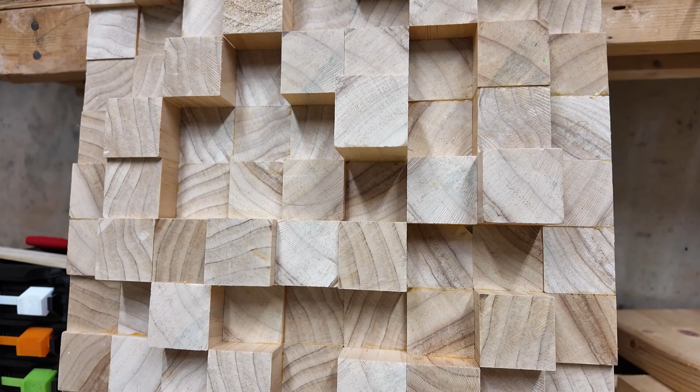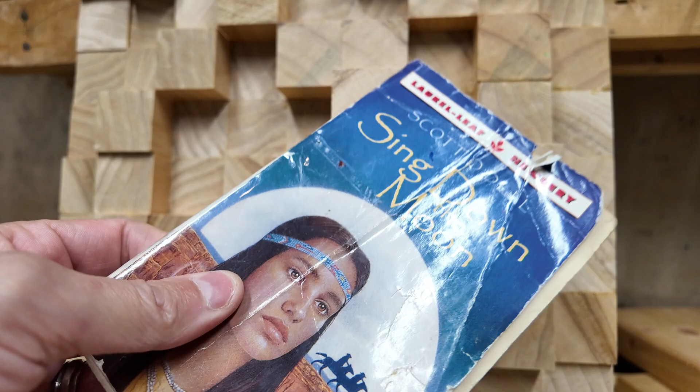So my kid brought home his first novel from school, and if we take a look here, it's fine, nothing big deal, but this thing is wrecked. We tried taping the spine here to get it going, but it's going to get beat up more and more inside of his backpack with all the stuff he carries.

So let's design something to keep this thing safe so it doesn't get wrecked in the backpack. This one's going to be pretty simple as far as design work goes. We're going to go into Sketch, and I think we're going to start this on the top view. That makes the most sense, mainly because we're going to build up. Now the book itself is just under 7 inches, and the thickness of it is just under a half inch. So we're going to set those as our baseline.

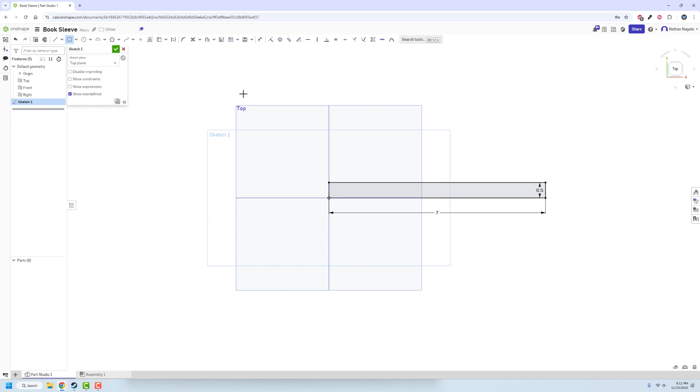Once we have that, we could draw another rectangle around this, or we could use the offset tool to get the exact same effect done. I'm going to use the offset tool here, and we should get an error message, and we're just going to drag that out, then hit enter, and all we have to do is change our distance here. I'm just going to change that to 1/8 of an inch. It doesn't need to be anything crazy, but it should work fine for what we're doing.

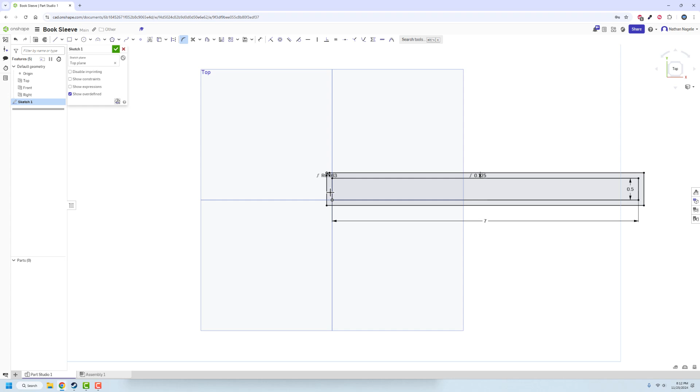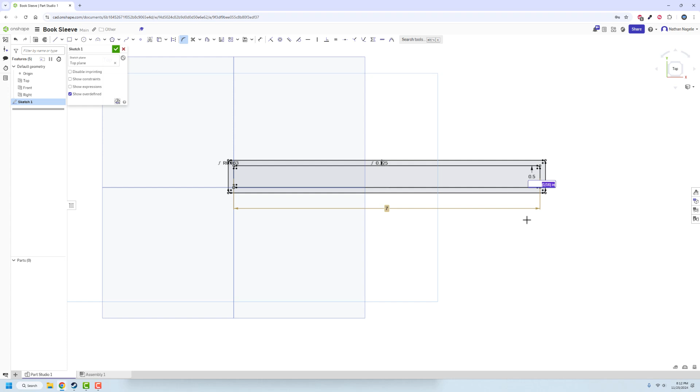And then we're just going to quickly add some fillets here to the inside edges, and those are going to be 1/16 of an inch, I believe, is what I want to make those. Nothing crazy, but just setting where we need them to be. I can do this far more quickly once we extrude it, but I'm just doing it now because that's what I feel like doing right now. So we're going in, getting all of those edges set to be a 1/16. Nothing crazy, but setting the inside and outside corners there, making sure we have a consistent thickness all the way around. So I'll finish the sketch there.

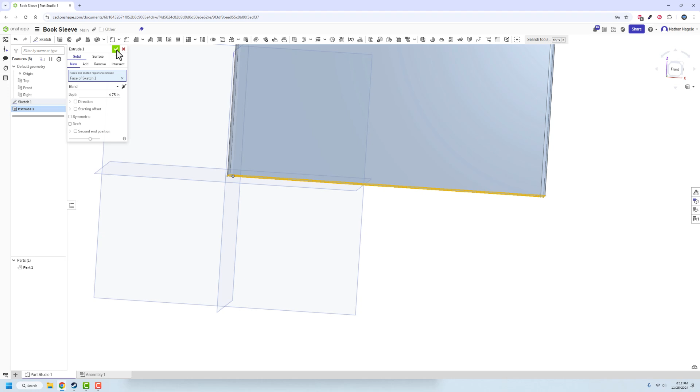And then we'll add another sketch to the bottom of this. We'll finish that up, and we're going to extrude just that sector out, and that's going to be 1/8 of an inch. All right, so that's going to be kind of the initial setup here.

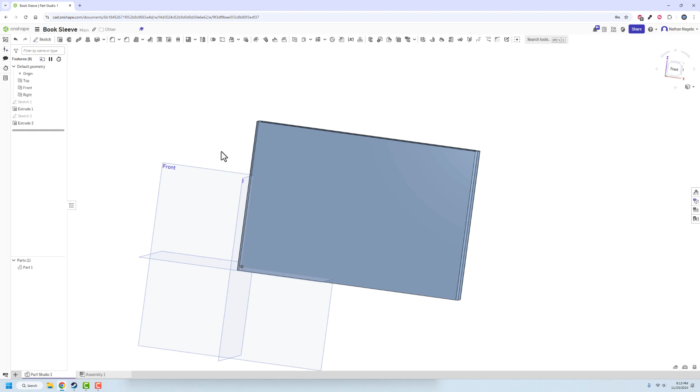Now, that's not going to be all we want to do. We also want to add a place for your hand to go, to figure out what exactly is going on with this. So I'm going to go into Sketch again, and then we will get this figured out as far as where it's supposed to be. We're just going to use the 3-point arc for this to set where that's at, and then we can use dimensions to really define exactly where that's supposed to be.

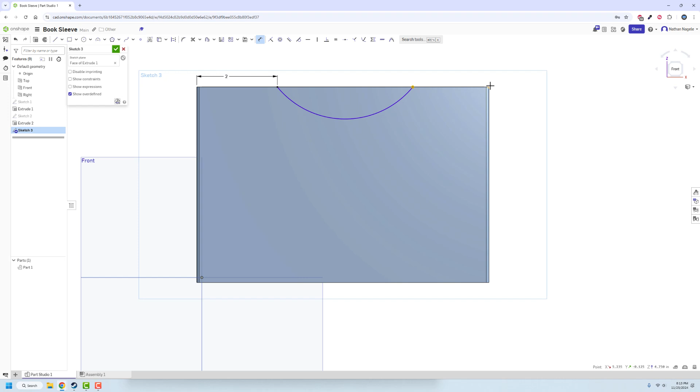So we say that's over 2 inches, and then this one, if we make it also over 2 inches, we can get that set, and then the radius on that, if we make it 2, sure, that should work. Then we'll extrude that and remove, and instead of blind, we're just going to go through all. It will cut that out of everything.

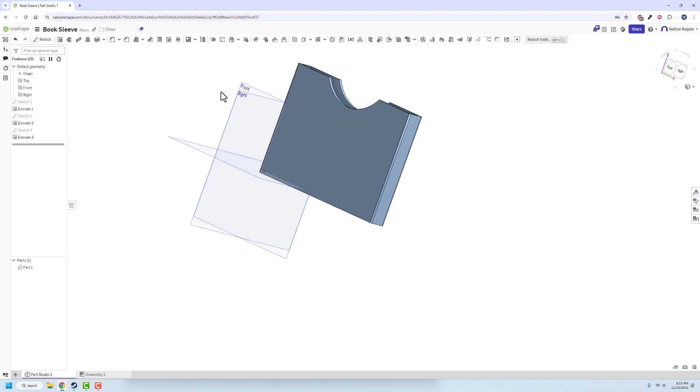So we have that. The book should fit in there, no issue whatsoever. I actually think I want to change the height of this extrusion. Instead of being 4.75, maybe 4.5. I think that might be a little bit better for what we're doing here.

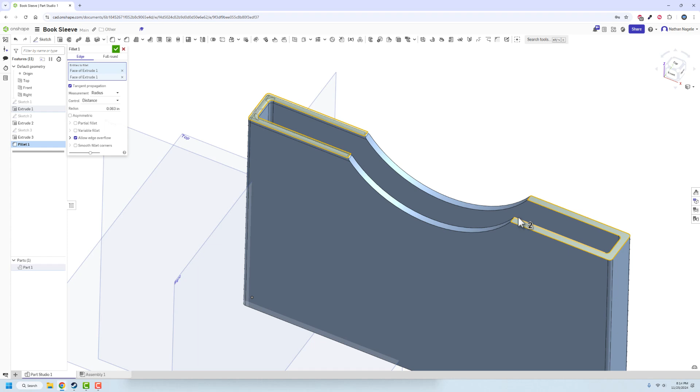And then we're going to put a fillet around the whole top edge of this, and it's going to be 1/16. That should allow us to round over all of the parts here. Let me not get the edge here, but the actual face. And we'll do the same thing with this one and that one. And we'll hit our green check.

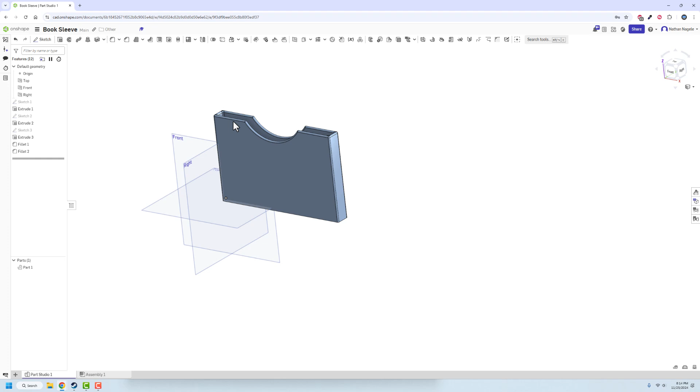And now we have all of that in there. The only other thing I'm going to do is put fillets on this bottom face in here, just so the book doesn't have a corner to escape into, so it's a little easier to get out. But that is all we're doing. The whole point of this thing is just to protect the book while it's in the backpack so it doesn't get mashed by all of the other things my kid has.

So we're going to export this. We'll throw it in the slicer and see what we have.

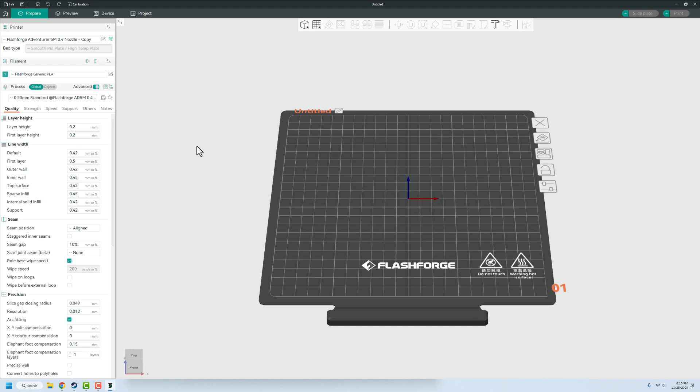So here it is on the slicer. It's going to be a relatively thin print, and it's only a 1/2 inch, so I'm not really worried about wobble or anything. Like if I were making a really thin tower or something like that, this should be based up enough to not really be a concern.

But I am printing it not on my bed slinger, but this is going to be on my CoreXY, just because I don't have to deal with the bed itself moving where it could shake this thing off. The bed just is slowly moving down, it only goes up and down. The head of the machine itself is what goes through and changes all that.

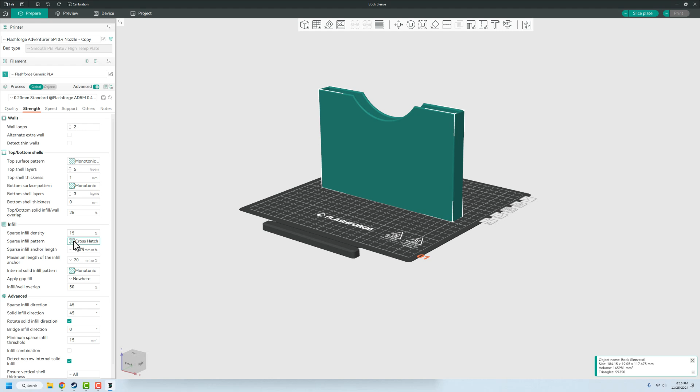So the only other thing we're going to do is with strength here, 2 wall loops is just fine, our sparse infill density is fine. The only thing we're really going to change is instead of crosshatch, let's just change that over to triangles, and we'll do this one too. Sure, whatever, we'll get that in there.

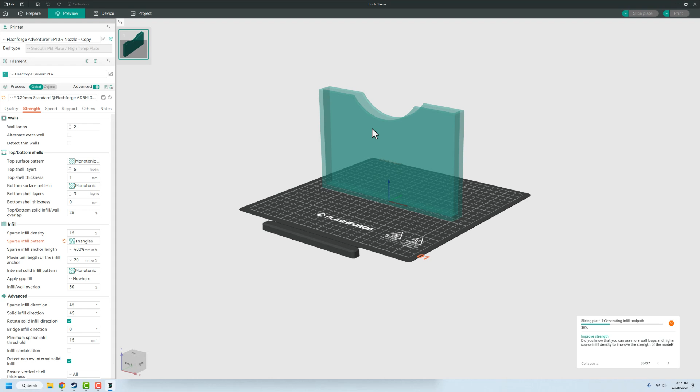We're going to slice this bad boy up. It shouldn't take too long to print - it's a 2-hour and 32-minute print. And again, I could probably change a few parameters on this to make it better, but for right now I think it'll be just fine.

So we're going to save it, print it out, and see what happens. And here's the final print.

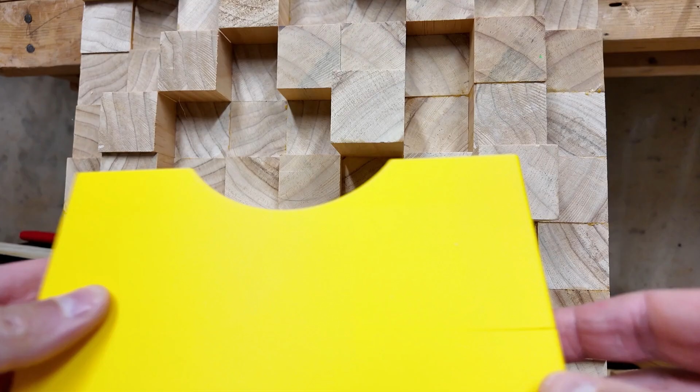It's not the most beautiful print in the world. There's some layer lines here, there's a little separation that goes around. I'm not sure what exactly happened, but it's super comfortable.

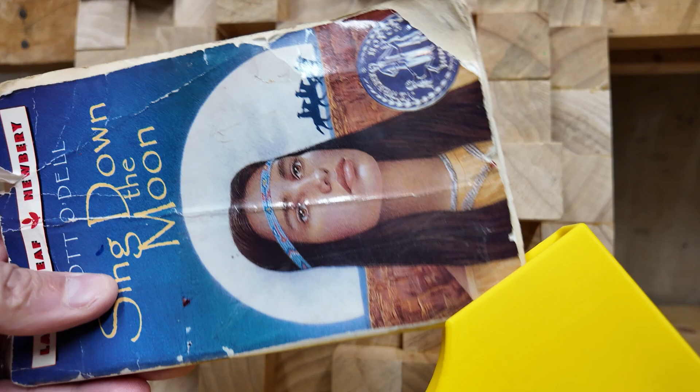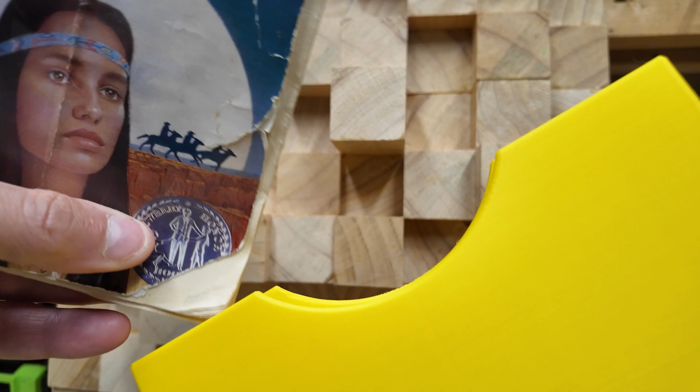And you can take this and just slide it in either spine ways first and pop it down - it's nice and protected. Or if you're feeling so bold, you can go the other way and put it in book side down, or non-spine side, I don't know what it's called. It takes a lot more effort to get in there, but you can get in there and you can still see exactly what it is.

And what's cool is you could have a bunch of these things printed up and theoretically put labels on the side, and you have these things ready to go so that you can easily print and protect your books for whatever you need.